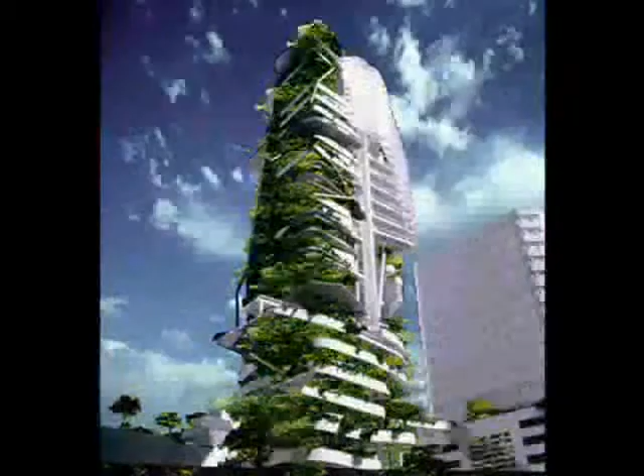First up was Dr. Ken Yeang, who's well known to us at the Council and has been a supporter for many years. Ken took us through some of his seminal green skyscraper work from the past 2 or 3 decades, and left us with some projects currently on the drawing board in his office, which bode well for the future and the challenges facing us in sustainability.

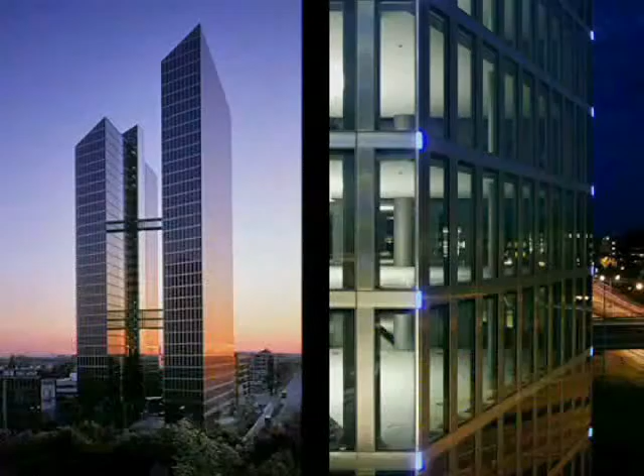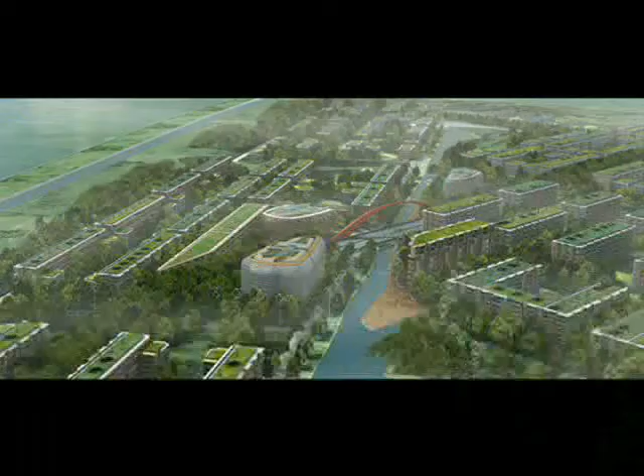Professor Werner Sobek of Werner Sobek Ingenieure in Germany gave us a fascinating insight into what structural engineers can be doing to add to this cause of sustainability. And Gary Lawrence of Arup Limited talked to us about some of the projects Arup are doing around the world in creating new sustainable cities of the future, specifically the Dongtan Eco City project near Shanghai and others.

How about greening the skyscraper? Biodiversity is extremely effective because in nature you have both organic and inorganic components, or in ecosystems, biotic and abiotic components acting together to form a whole. Now if you look at a building like this one, everything in it is inorganic. The only thing that's organic is you and me and the bacteria and the bugs.

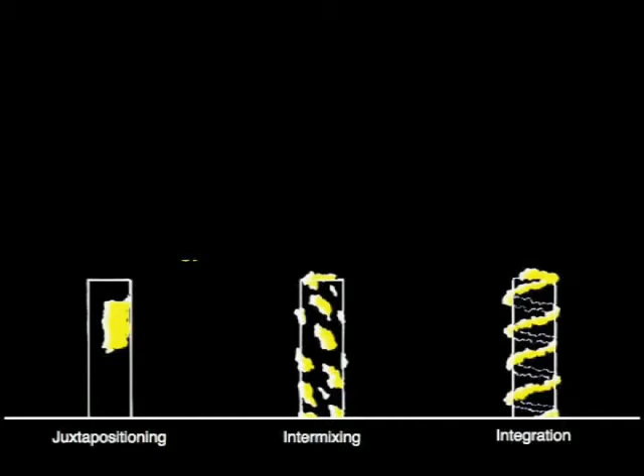And so if you keep building like this, the whole world becomes increasingly artificial. So the idea of putting vegetation into buildings was something that intrigued me, and I started looking at different ways of doing this. This diagram shows you can put all the vegetation in one location as sky parks, called juxtapositioning, or you can have a more spotty relationship like intermixing, or you can have integrated relationships, as in the bottom right-hand diagram.

From the ecologist's point of view, the bottom right-hand diagram is preferred because it enables species migration and better interaction between species, engenders a habitat with greater resources for sharing, and therefore generates a much more diverse and stable ecosystem.

Now this image is also emblematic for me, because I believe the skyscraper or the green building of the future will not look like a conventional autonomous building. It will be fuzzy, it will be hairy, it will be an integration of organic and inorganic mass.

Focusing a little on facades, I'd have a closer look at this building, which is also remarkable because it has no core. It is a composite structure with concrete slabs. But the 2 buildings are totally independent, because the clients wanted to sell them independently.

We showed a special feature here: these more or less transparent bridges, which are clip-on, clip-off bridges. That means they are hung between the 2 buildings and can be replaced by a crane depending on the owner's ideas or demands. The buildings themselves now become critical in how they work.

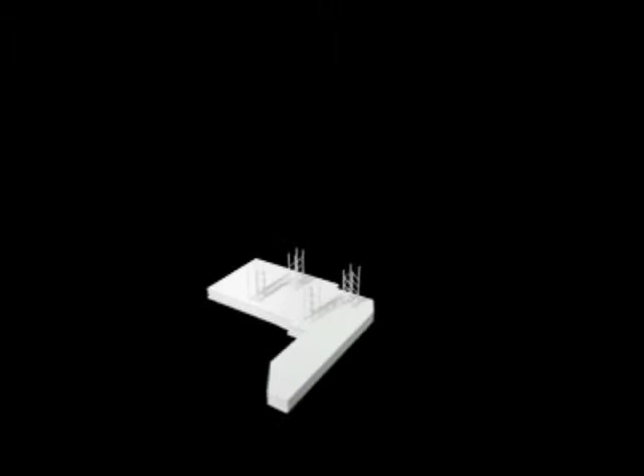As I already said, they have no core. They are very, very lightweight. I think here we went to the limit of what you can do using composite structures. Each building has 2 U-channeled truss systems responsible for taking the horizontal load. In between them there are a couple of gravity columns which can be done relatively slender, so the structure itself does not show any obstacle at floor level.

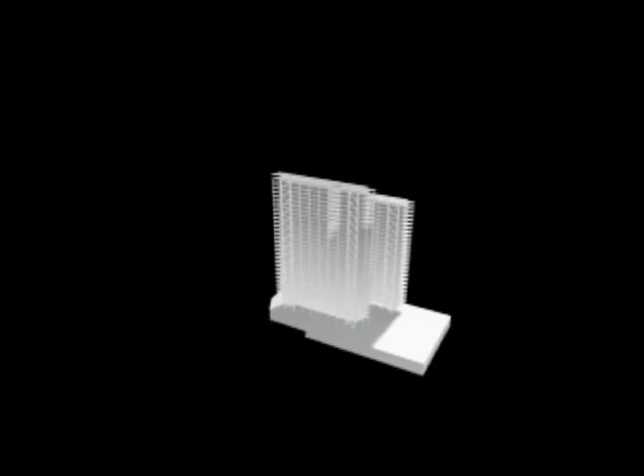So sitting here, on one hand you could look for 70 meters without having any obstacles. This allows for a lot of flexibility. It allows a lot of transparency. And if we talk about transparency, I'd like to focus a bit more on the facade itself. This is one end of the building, and you see here the diagonals of this U-type truss channel, which is responsible for taking the horizontal loads.

And this is the facade, which is a triple glazing, elementized facade of that size. This is a stainless steel cladding with horizontal slots, and behind those horizontal slots there are operable windows. So everybody can open the window independent of the weather situation, because the slots are designed such that even with heavy wind loading, the wind does not blow your paperwork away.

The issue of finding successful ways to create livable communities in which people's behaviors will actually change in order to address climate consequences requires that we think not just in terms of technology, but understand the issues of nostalgia, fear, and aspiration, all of which are major players in determining people's willingness to change their behaviors in order to adapt. There is a huge information deficit in the community about these kinds of questions, and a variety of other deficits.

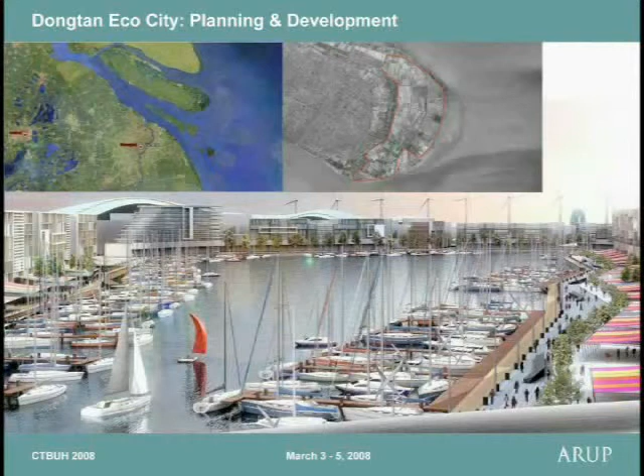We think of sustainability not as an end, but as a means. The only legitimate end of all of our endeavors is to optimize conditions for human development over time. Sustainability is an analytical framework and a decision-making tool that allows us to think in depth and in breadth at the intersection of issues and through time in order to work on these optimization strategies.

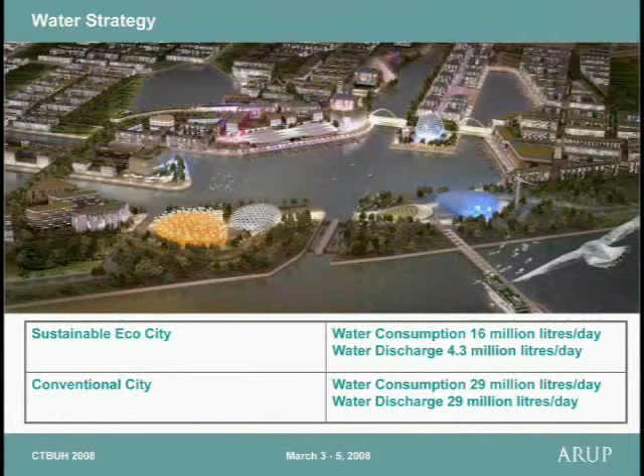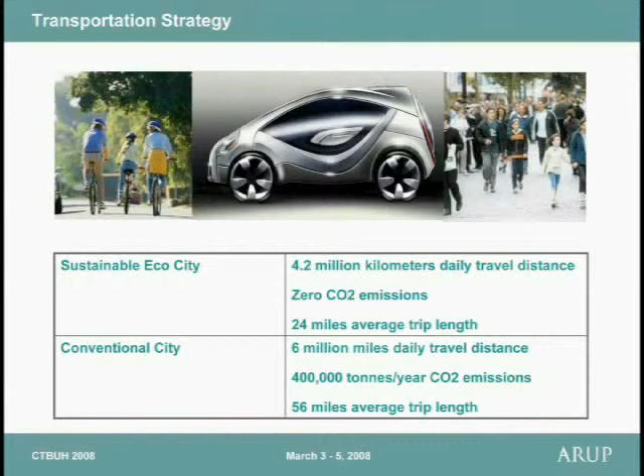As we're worried about these carbon issues in communities, both mitigating the effects of our behaviors in increasing greenhouse gases and also mitigating the consequences or adapting our communities to the inevitable consequences of change, we have to get much smarter about the human side.

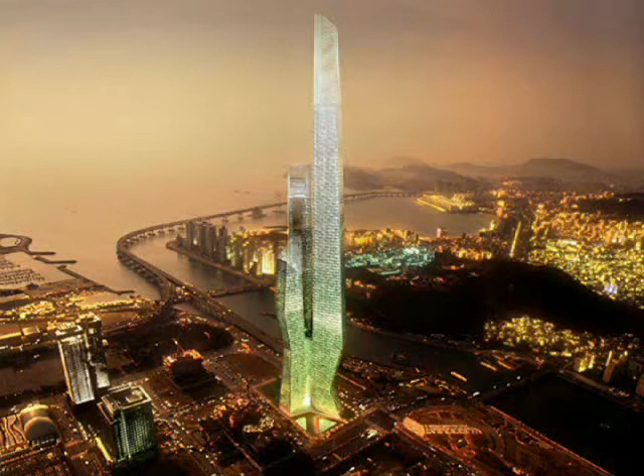Perhaps the best non-plenary session, judging by delegate feedback, occurred on day 3 of the Congress, entitled Alternative Design Thinking. We intentionally convened 4 of the world's most famous architects in the high-rise field, with the intention of getting across some of the alternative ways that tall buildings are being developed and designed. The first speaker was Hani Rashid of Asymptote Architects in the US, who took us on a global journey, showing some of the iconic sculptural tall buildings his studio created in cities from America to Malaysia.

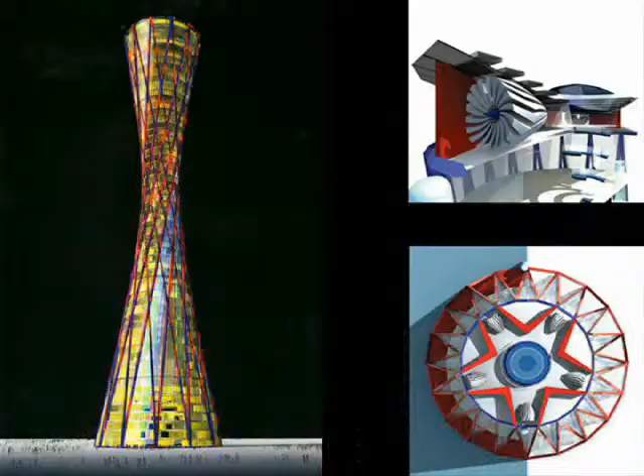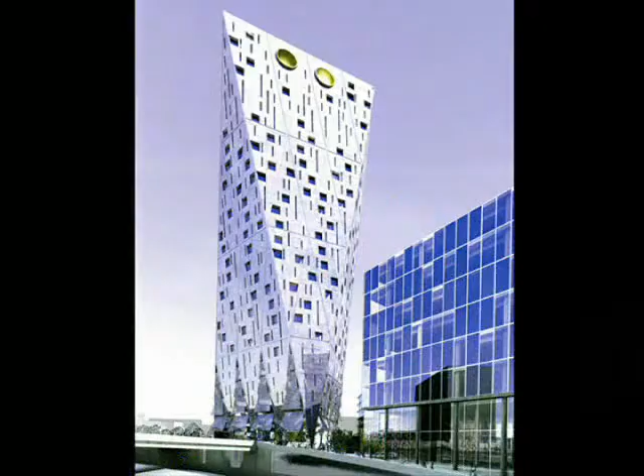Second was Ken Shuttleworth of Make Architects in the UK, formerly of Foster & Partners. Ken's work was no less inspiring than Hani Rashid's, and he had an additional agenda, clearly typified in the title of his paper: Form and Skin, Antidotes to Transparency. Ken is a firm believer that we should no longer be building all-glass towers in many places around the world.

The third speakers in this seminal session were Simon Allford and Paul Monaghan of Allford Hall Monaghan Morris in the UK, who took us through several projects changing the entire urban landscape in provincial cities such as Liverpool and Leeds. Their Unity project in Liverpool is worthy of deserved mention for what it does to the Liverpool skyline.

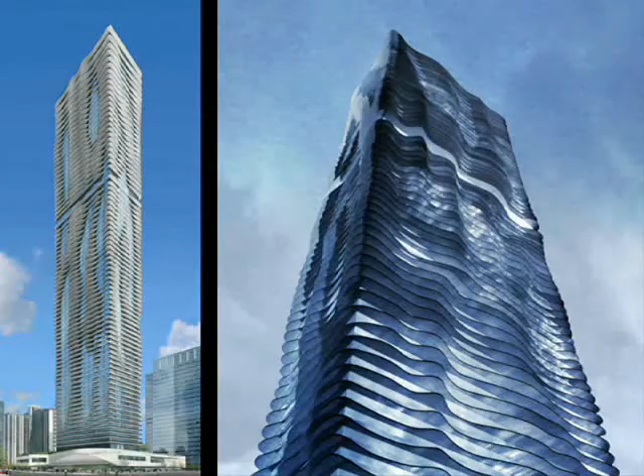And the fourth speaker was Jeanne Gang of Studio Gang in Chicago, who gave us insight into the design ideas behind her Aqua Tower, this incredible morphing tower in Chicago, and several other ambitious projects. This was clearly one of the best sessions of the Congress, and the question and answer discussion that followed embraced many people and epitomized some of the best aspects of the Congress.

The first building I'm just going to show quickly is a proposal for the DIFC. It was something we did in collaboration with Dewan Associates and Arup Hong Kong. This is a building that really was meant, from our design point of view, to create a kind of spectacular presence. What would, in fact, a kind of Eiffel Tower of our time be for a place like Dubai?

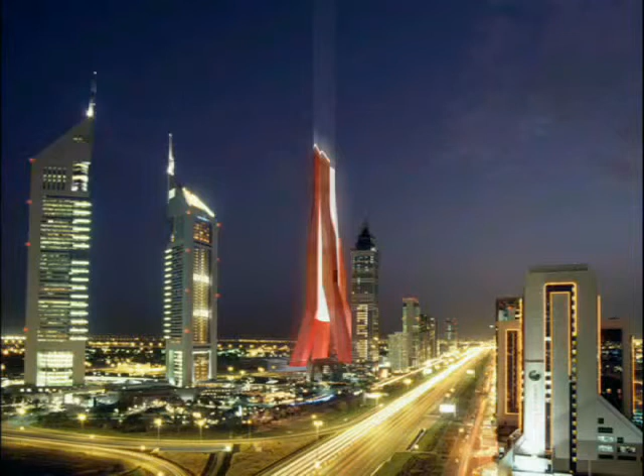If Dubai is a kind of crossroads now, a cultural and economic engine as it is, could there be an iconic building that stands up against all the iconic buildings going up all the time here? It's not necessarily just a question of height, it's also a question of a kind of cultural DNA and a kind of reverberation that the project can have in the city space.

We began the process by essentially stacking and binding 4 towers, 4 very slender towers that would bundle around a kind of glass core, and that glass core would be held in place almost metaphysically up above the city of Dubai. The idea was that we could produce an elegant solution, both engineering-wise and architecturally, by bringing these 4 towers into close proximity, using a kind of inclined elevator system and cores to come up into a body of a building that could then reach up into the sky at a very spectacular height.

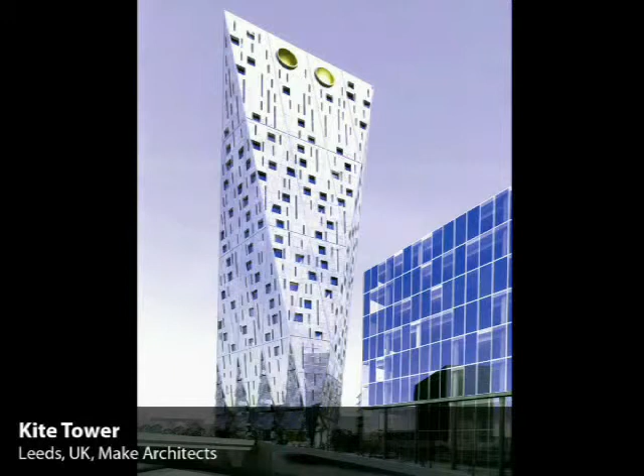As oil supplies decrease and become more expensive, I think it's more important that we actually face up to it, and a lot of this comes through the external wall of the building. So at Make, as far as we're concerned, it's not a sort of greenwash. We don't just apply sustainability or low energy as a bolt-on goodie, it's actually part of the design process.

So looking back, before air conditioning, this is work we did with Atelier 10. Buildings were very solid, with high thermal mass, designed to be naturally ventilated to respond to the environment. The buildings were very solid, in a way, with punch windows, and they actually had quite a good engineering solution to the environmental side of it.

It had no insulation, but they actually got the shading and the thermal mass mostly right.

And I think the engineers, the mechanical, electrical building association, this is your moment. This is your moment where we're going to take you seriously. And if we're not as architects taking you seriously, then we don't deserve to be architects. So as an engineer, you've got to biff the architect, you've got to get your confidence back.

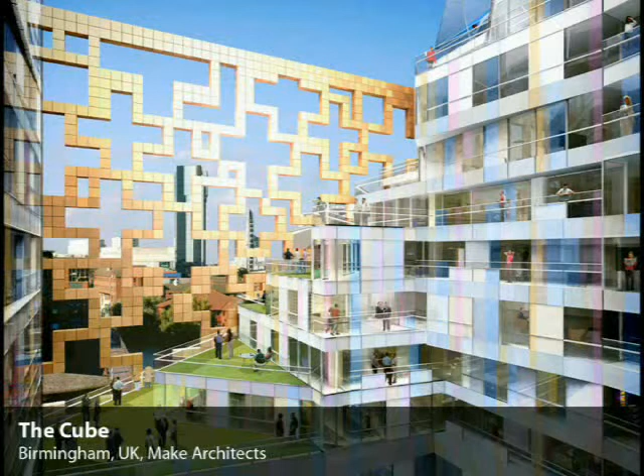And we're not going back to Georgian times, not going back to boxes with punch windows. We're looking at cladding in a way that transforms itself. It's fantastic Escher drawings, the design changes as you go around the building, almost without noticing.

And basically, for me, it kills the glass box. It changes the idea of the box. It changes the idea of it all being glass. It makes it into a form that is a sort of exploration of the way we should be designing modern architecture of the 21st century. Thank you very much.

So London has a strange context. We have to explore it in a section. We have this extraordinary set of relationships where, to the right, you have the outline of Renzo Piano's Shard, and the Tate Modern in the distance. And then a small tower suggesting 18 stories, a residential tower, like Ken was saying, moving away from the glass building. This is a concrete extrusion wrapped in aluminium.

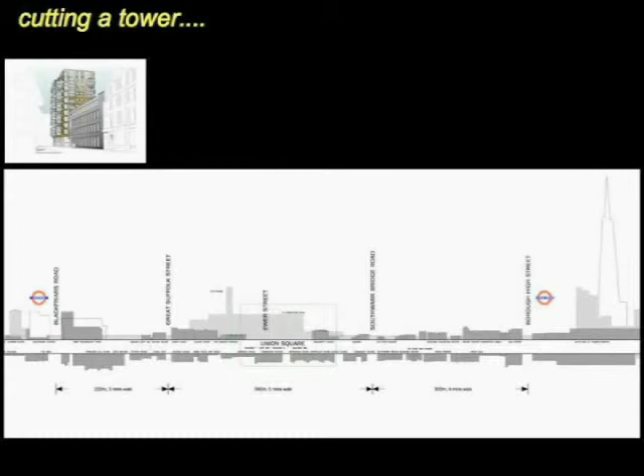High-density urban living. This is the basic diagram of the building. Then the concept comes along that you can't go above 8 to 12 stories in central London, and you have to remove the upper floors. You do that for the first planning consent, then you go back a year later with another 12.

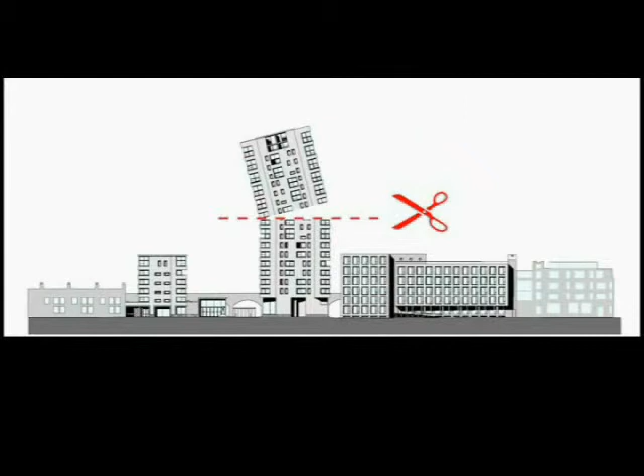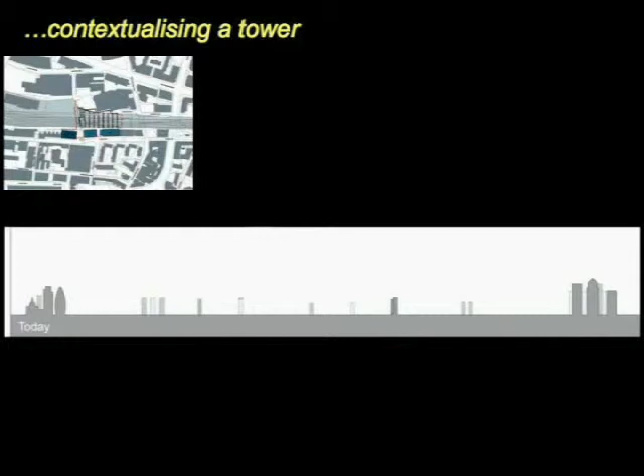One has to contextualise towers. So this is us working in Docklands, which is that middle land between Canary Wharf and the city, where the tower has to be linked into other elements around it. It is a local landmark. In this case, it's a 36 and a 40-storey residential tower.

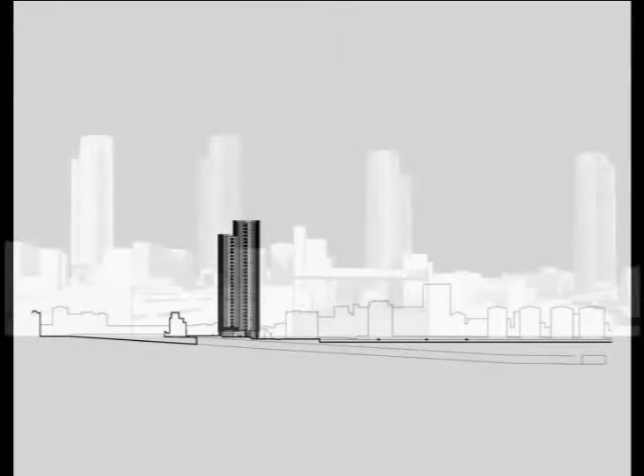They're twinned, they're engaged. It's only 10 flats a floor, about 10,000 square feet, but these two towers sit pretty much in isolation over Victorian infrastructure. So it's really a question of cutting the eye of the needle through the infrastructure of London, and then looking and justifying it as a local landmark.

So you get this idea that these buildings are very specific to their context. They offer something back to the city. As you move into the city, that public amenity tends to rise up to the top of the building. It becomes the sky room that's open to the public. Although Westminster recently advised me they've got more sky rooms than they need, and they'd rather keep the buildings down at floor level.

But on these outer levels, it's about cutting away and saying, actually, we can solve an infrastructural problem. We can create a new park, a new urban space. We can make new connections. We can build new bridges, metaphorically and physically, to tie together the lost lands. And this is the idea of the skin, a series of vertical things that actually move around the building, adjusting to pick up wind and shelter balconies behind.

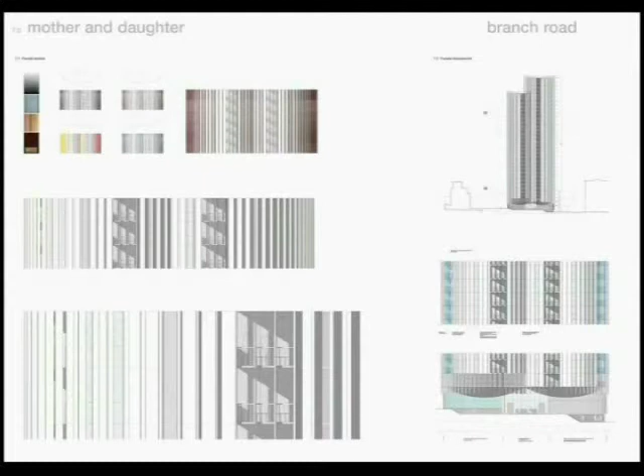I've done a lot of thinking about the building type of the tall building, especially leading up to this conference, and I was noticing that there's a lot of advancements going on in the building type in terms of exceeded heights, lots of different types of people doing tall buildings, and some environmental approaches. But altogether, I feel like there's a bit of stagnation in the tall building type, and I just wonder if we're doing our best right now to mine all the cultural, economic, and environmental potentials that are inherent to it.

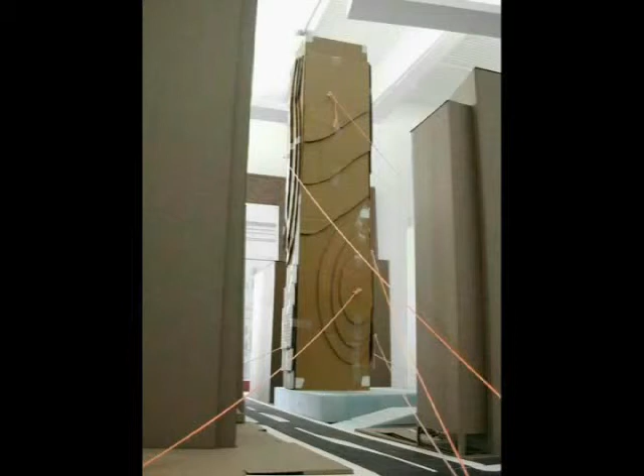So by bumping out the facade in certain areas, you might be able to see around a corner, especially for these lower units in the building.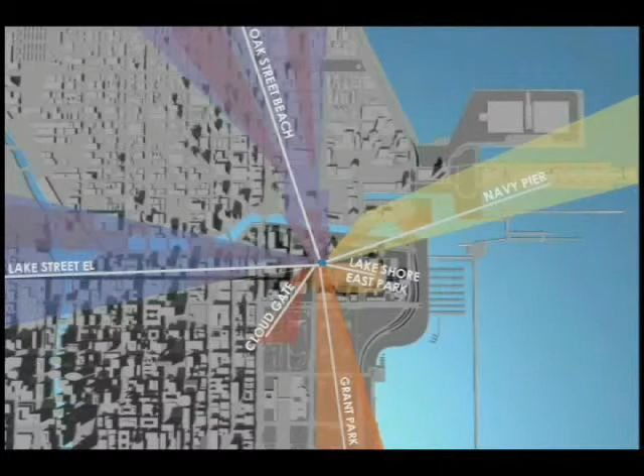And we identified six major views of landmarks in the city that we wanted to gain for some of the units on the lower levels, which in turn created almost a topography for this tower—so it's almost like a vertical landscape.

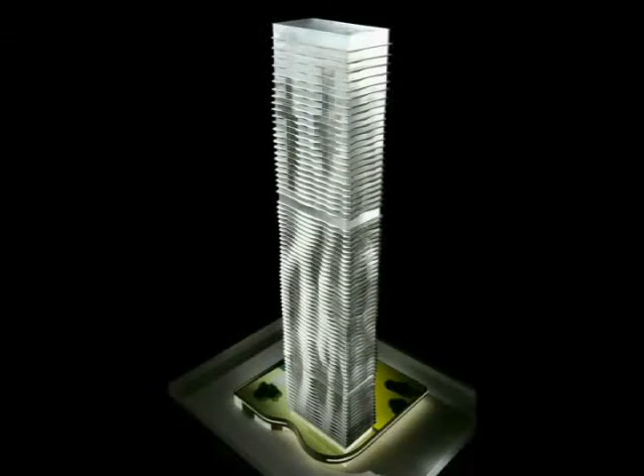And as we developed the tower, those first bumps remained, but they got changed in terms of shape due to all of the other functions of the tower, such as the balconies and solar shading.

One thing that's worrying me, from what all the speakers have said, you've all clearly indicated a move away from iconism towards what is rapidly looking like sustainabilism. You're desperately trying to find an aesthetic, and you seem to be doing it through things like this parametric software to reflect the environmental constraints onto your building to give you a design. Isn't it time we found a new sustainable aesthetic in the way Palladio did?